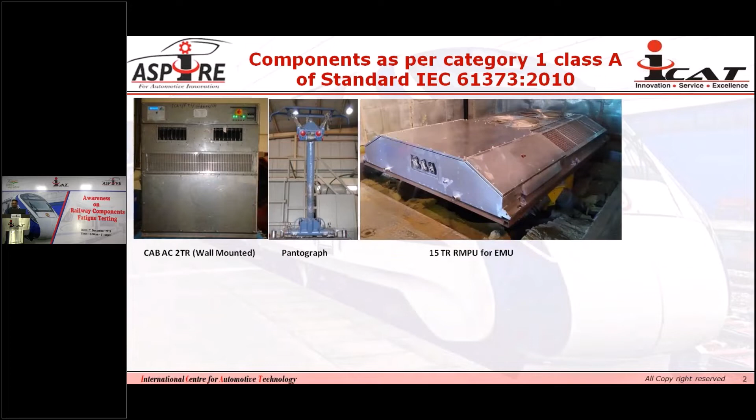So this is the cab AC 2TR wall mounted, which was tested as per the IEC 61373 under the category 1, pantograph, RMPU. So these are the components which we have tested as per the category 1 class A as per the standard IEC 61373:2010. LED based dynamic route map, oil cooler radiator.

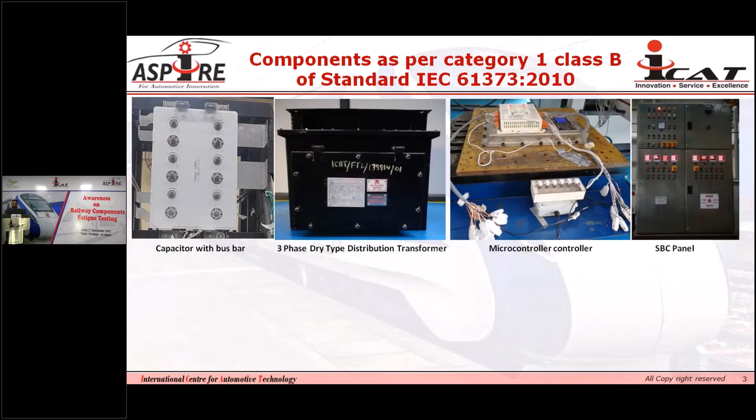Now the images of some components which we have tested as per the category 1 class B: capacitor with bus bar, transformer, microcontroller, panels, SBC underslung panels, line choke, and a spring loaded switch. So these are the various components which we have tested as per the category 1 class B of standard IEC 61373.

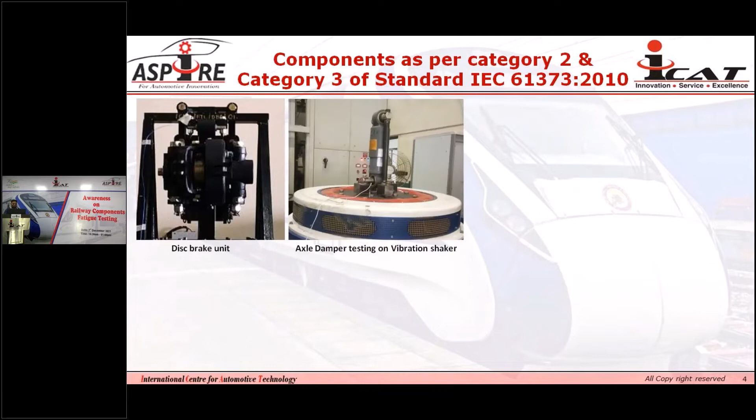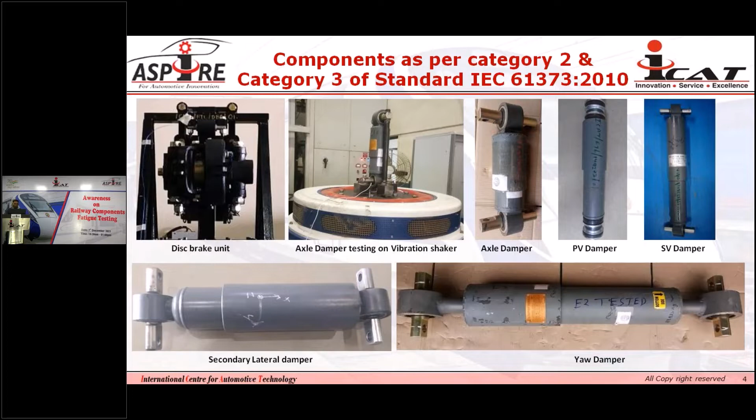Now there are the few components which we have tested as per the category 2 and category 3 of this standard: disc brake unit, axle damper, which we have tested as per the category 3 of this standard, primary vertical damper, secondary vertical damper. So these are the various components which we have tested as per the category 2 and category 3 of IEC 61373. So let's move on to the main contents of the presentation.

So these are the contents. First of all, introduction, scope of the standard, standard measuring positions used for the axle, bogie and body mounted for the different categories, general location of the equipment on railway vehicles and their resulting test category, testing as per the IEC 61373 2010 version, order of testing, method of mounting and orientation of equipment under the test, functional random vibration

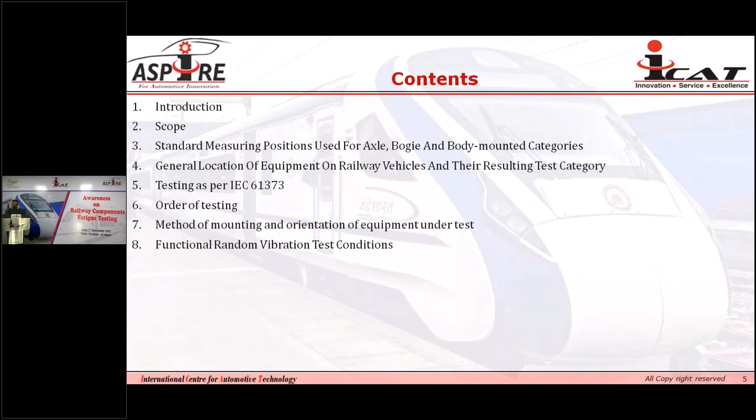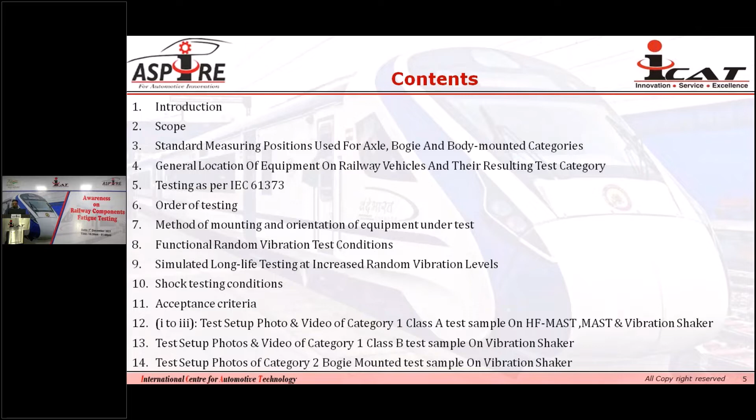test conditions, simulated long life testing at increased random vibration levels, shock testing conditions, acceptance criteria, and last we'll show you some photos and videos of testing for the different categories. For example, category 1 class A on HF mast and vibration shaker, test setup and videos of category 1 class B test sample on the vibration shaker, test setup of category 2 bogie mounted test sample on the vibration shakers. So introduction.

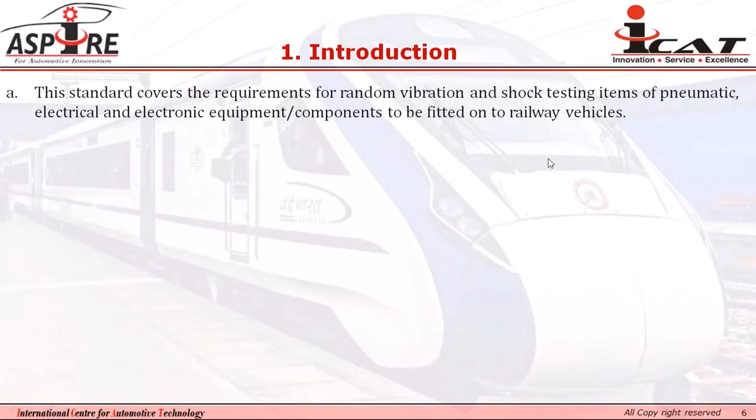Okay, so introduction. This standard covers the requirements for random vibration and shock testing items of pneumatic, electrical and electronic equipment/components to be fitted on the railway vehicles. The test content within this standard is specifically aimed at demonstrating the ability of the equipment under test to withstand the type of environmental vibration conditions normally expected for railway vehicles.

In order to achieve the best representations possible, the values quoted in the standard have been derived from actual service measurements submitted by various bodies from around the world. This standard is suitable for design and validation purposes. These tests may be performed on prototypes in order to gain design information about the product performance under random vibration. However, for test certification purposes, the tests have to be carried out on equipment taken from normal production.

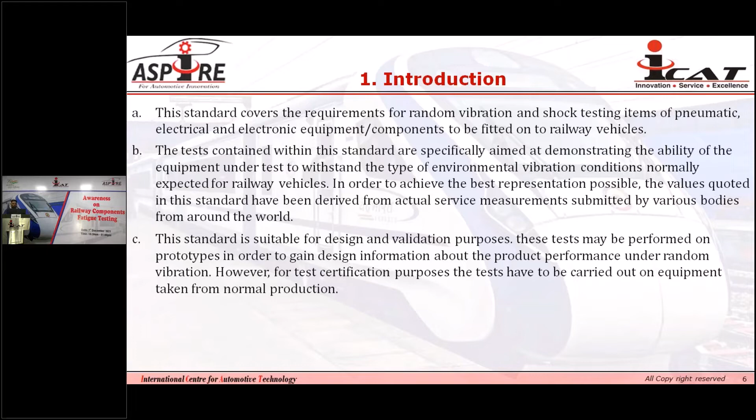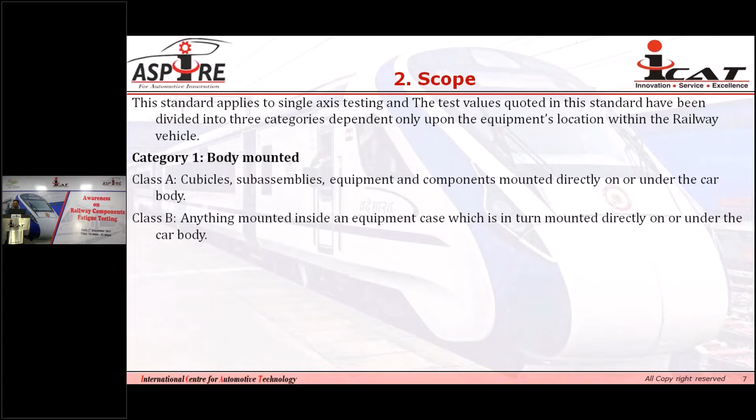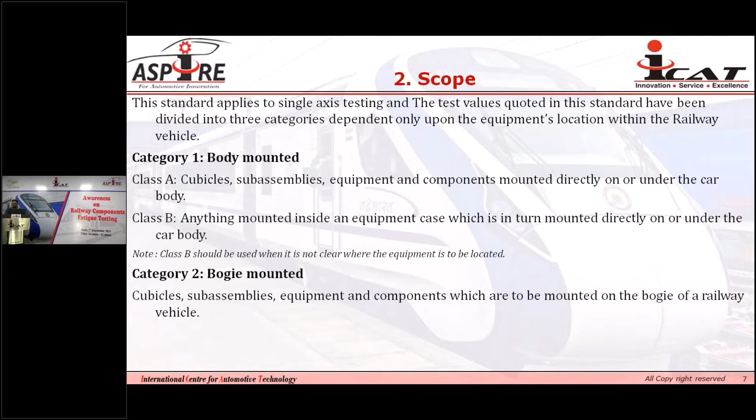And there is a note point. Class B should be used when it is not clear where the equipment is located. In that case, testing can be carried out as per the category 1 body mounted class B. Now the category 2, that is the bogie mounted. The cubicle, sub-assemblies, equipment and components which are to be mounted on the bogie of the railway vehicle come under category 2 bogie mounted. Now the category 3, that is the axle mounted. Components or assemblies which are to be mounted on the wheel set assembly of a railway vehicle come under category 3 axle mounted.

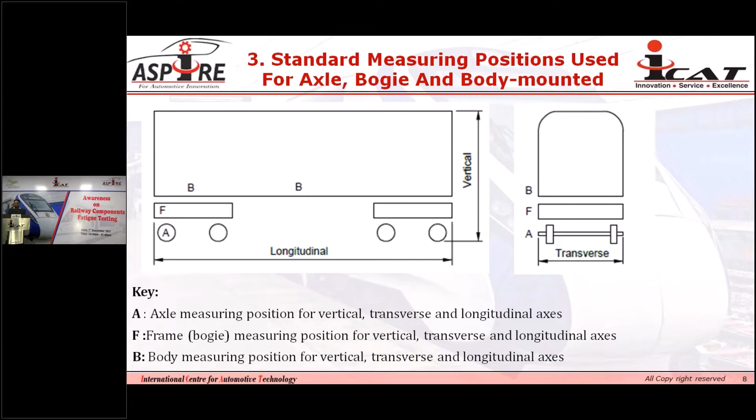If the components are mounted over the frame of the railway bogie, testing will be carried out as per the category 2 bogie mounted test condition. If the test components are mounted on the body, then the testing will be carried out as per category 1, either class A or class B as per the requirement or the position. We'll discuss further in a later slide in which condition we should consider class A and in which case class B. So now the general location of equipment on railway vehicles and their category. So this is again a schematic of the railway bogie.

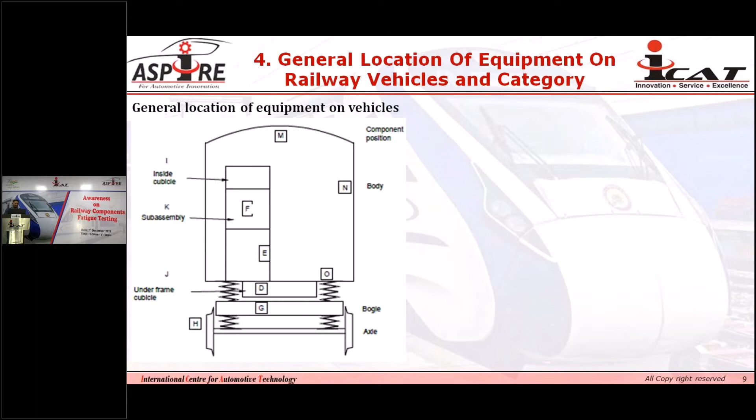So these are the major locations which are identified in the railway bogie where components are generally fitted. So first, for category 1 class A: location M, location N, location O, location I and location J. If the components are mounted at these locations, then the testing will be carried out as per category 1 and class A of standard IEC 61373.

If the components are mounted at location D on the frame of the coaches, in that case testing will be carried out as per category 1 class B of the standard. If the components are mounted at location K and location E, that means inside any large equipment, components mounted into a large internal cubicle which in turn fits to the car body, then again testing will be carried out as per category 1 and class B.

If the component is mounted at location F, meaning a sub-assembly inside any large components of the bogie, then again testing will be carried out as per category 1 and class B. If the components are mounted at location G, that is the frame of the bogie, testing will be carried out as per category 2, bogie mounted. If the components are mounted at location H, on the axle of the car body, testing will be carried out as per the requirement of category 3, axle mounting.

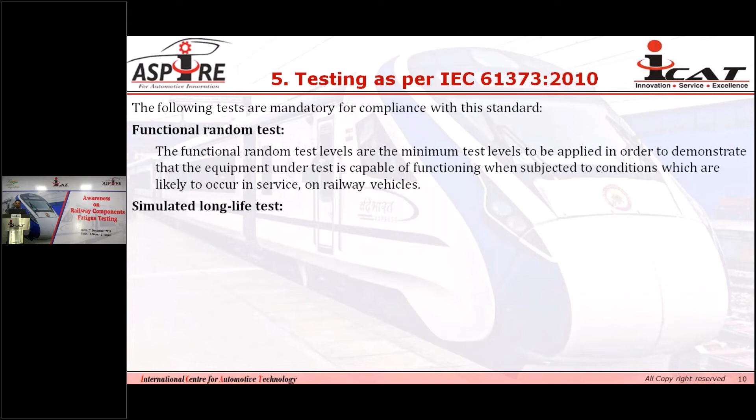Now the simulated long life testing at increased vibration level. The main objective of this test is to simulate the life of any equipment. This test is aimed at establishing the mechanical integrity of the equipment at increased service levels. It is not necessary to demonstrate ability to function; during this testing the equipment will be in the off condition.

Now the next test is the shock testing. The shock testing is aimed at simulating rare service events. It is not necessary to demonstrate functionality during this test. It will, however, be necessary to demonstrate that no change in operational state occurs, that there are no visual deformations, and that mechanical integrity has not changed. These points shall be clearly demonstrated in the final test report. For example, when we connect the coaches of a train with the engine, we might observe some kinds of shocks. So to simulate those conditions, these tests are carried out.

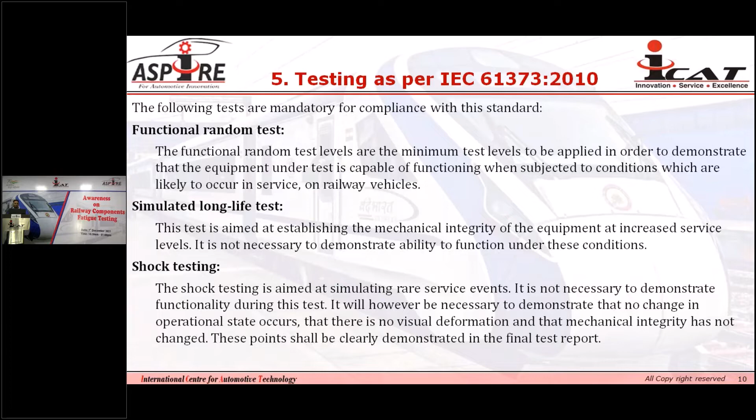So as we discussed, there are three tests: the functional random vibration test, simulated long life testing, and shock testing as per this standard. And all these tests will be carried out along all directions: vertical, transverse, and longitudinal. So now the question will come: what will the order of testing be? Which direction should we prefer first, then which direction, and after that which direction? This standard defines the possible order of testing.

So vertical, transverse, and longitudinal simulated long life testing by increased random vibration, followed by vertical, transverse, and longitudinal shock testing, and finally by vertical, transverse, and longitudinal functional random vibration testing.

Actually, this is the possible order defined by the standard, but it is also stated there that the order of testing may be altered to minimize rejigging, and the order of testing shall be recorded in the report. For example, if testing of railway components is carried on the vibration shaker, and if functional tests are carried as per this order - vertical, transverse, longitudinal - in that case we would have to do rejigging multiple times. So to avoid that, there is an option to alter the testing order to avoid rejigging of the test setup.

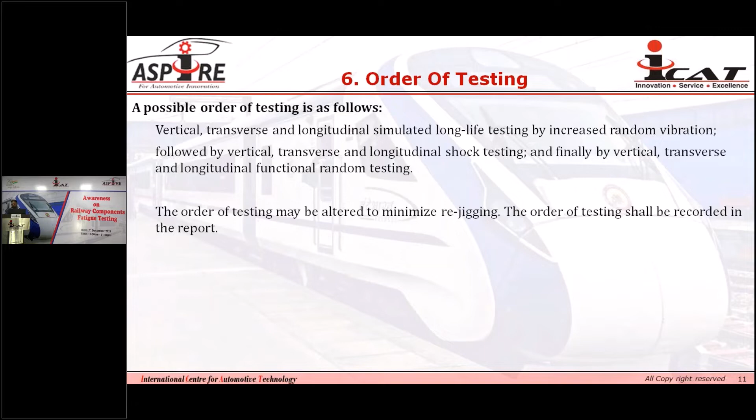Now, what is the method of mounting and orientation of equipment under test? The equipment under test shall be mechanically connected to the test machine by its normal devices of attachment, including any resilient mount, either directly or by utilizing a fixture. Unless otherwise agreed, it is preferred that the equipment shall be tested in its normal working orientation, with no special precautions taken against the effects of magnetic interference, heat, or any other factors upon the operation and performance of the equipment under test.

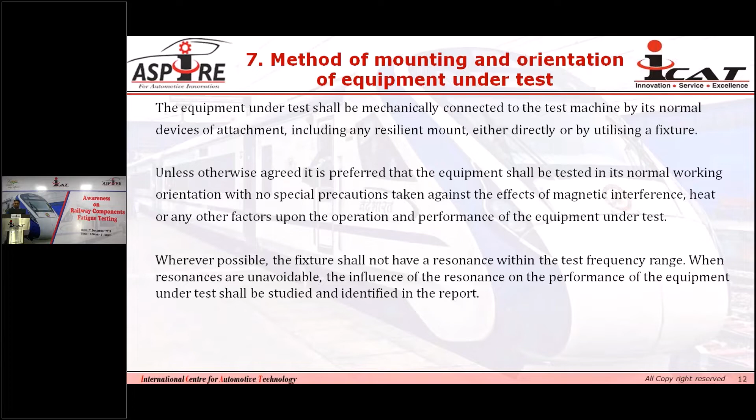Wherever possible, the fixture shall not have a resonance within the test frequency range. When resonances are unavoidable, the influence of the resonance on the performance of the equipment under test shall be studied and identified in the report.

This is an important point. Whenever you use a fixture to mount components on the test bed, it must be taken care that the fixture should be resonance free in the test frequency band. If there is a resonance in the test frequency band, it can impact the overall test result of the equipment, and it can hamper its mechanical integrity, or the sample may fail if there is a huge resonance in the fixture within the test frequency band.

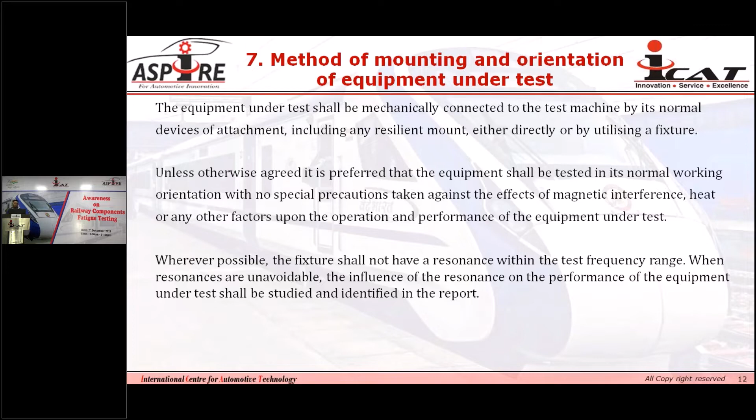Now let's move on to the testing. The first test is functional random vibration test. This testing is of minimum 10 minutes, and as we already covered, this is a test condition to simulate the service condition of the railway. These are the various vibration levels, RMS GRMS levels, given for different categories and classes. There is a very low GRMS for category 1 and class A components that are mounted on the body, because that part of the railway coach observes very little vibration.

That's why the RMS acceleration is also very low for this category. After that, the second highest is category 1 class B body mounted, because that part of the components in the railway coaches receives comparatively higher vibration levels compared to category 1 class A. So in this case, the RMS acceleration is comparatively higher.

Next is the bogie mounted category, those components mounted on the frame of the coaches. In that condition, the frame of the railway coaches observes comparatively higher vibration levels, so the RMS acceleration is comparatively high.

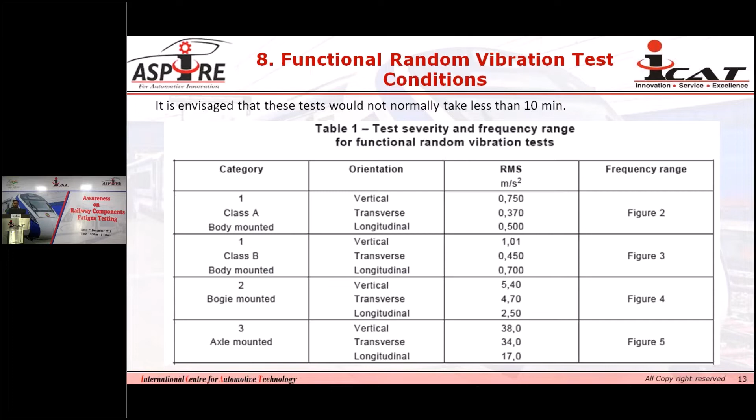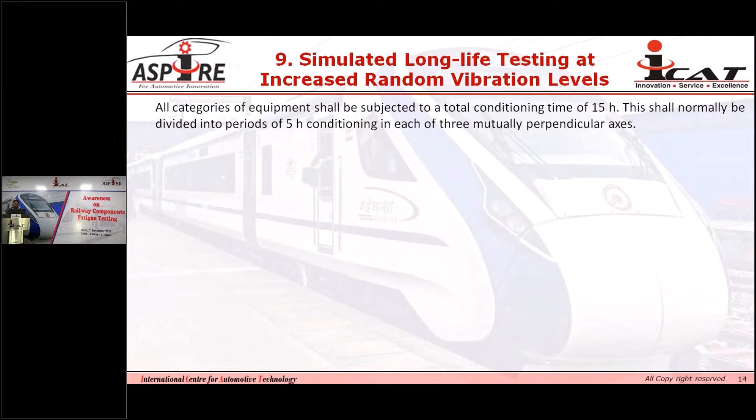Now the next test is simulated long life testing at increased random vibration level. The objective of this test, as we discussed, is to verify the mechanical integrity of the test component, and this is a total of 15 hours of testing - 5 hours along each direction: 5 hours vertical, 5 hours transverse, 5 hours longitudinal.

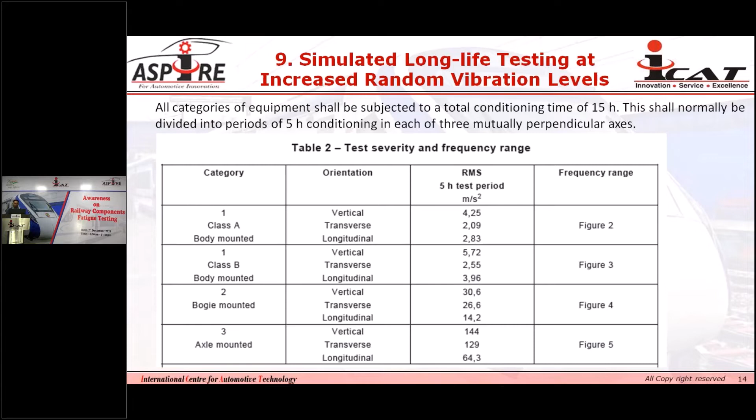Now figure 2 and figure 3 are for category 1 class A and class B body mounted. These figures depict how we can select the frequency band for a particular test component. Let me take the first example: figure 2 is for category 1 class A and figure 3 is for category 1 class B. The difference between these two figures is only in the ASD level, that is the acceleration spectral density, and GRMS level. The rest of the frequency band is the same in both cases.

The weight criteria is same in both classes. So how will we select the test frequency band for different weight of the test component? For this standard, the frequency band totally depends on the weight of the test component. For class A and class B, category 1, if the weight of test sample is less than or equal to 500 kg, then the frequency band will be 5 to 150 Hz. If the weight of the test sample falls between 500 kg to 1250 kg, there is a formula to calculate the lower frequency and higher frequency.

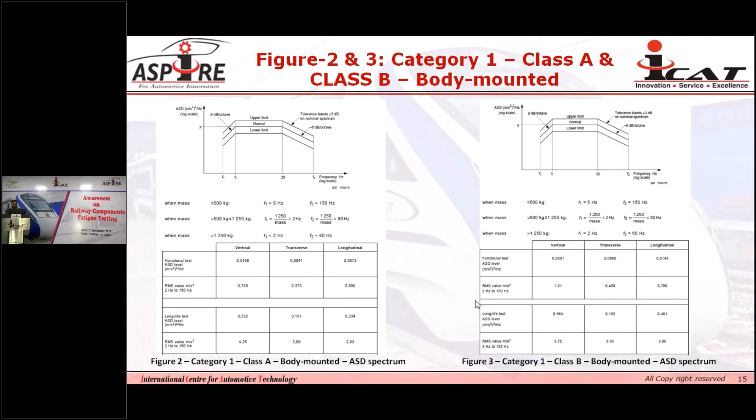Now figure 4 and figure 5 define the frequency band for category 2 and category 3, body mounted and axle mounted components. Let's first discuss category 2 bogie mounted equipment. If the mass of the test component is less than 100 kg, the frequency is fixed at 5 to 250 Hz. Again, if the mass of the test sample is between 100 kg to 250 kg, we have to calculate the lower frequency and higher frequency.

In this case, the formula is different compared to the previous case. For the lower frequency, we calculate 250 divided by mass of the test component, multiplied by 2. That gives us the lower frequency. For the higher frequency, 250 divided by mass of the component, multiplied by 100, gives the higher frequency. And if the weight of the test component is more than 250 kg, again the frequency is fixed, that is 2 Hz to 100 Hz.

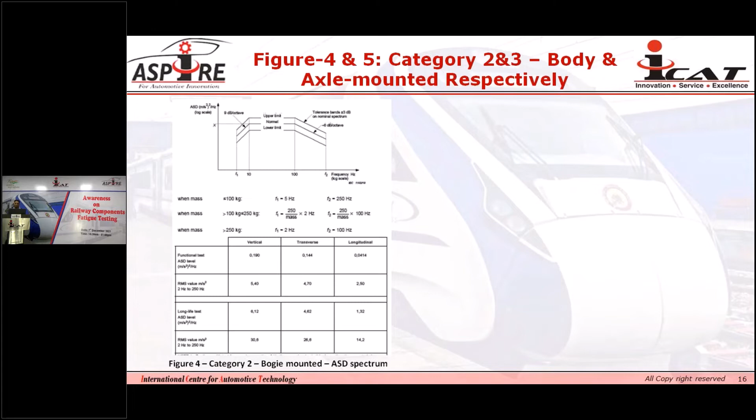Again, this is the table for the ASD level for the vibration test, along the vertical direction, transverse direction, and longitudinal direction. Also for different ASD levels for the simulated long life testing for the vertical, transverse, and longitudinal direction. So for category 2, this is basically the figure from which we can calculate the test frequency band for the category 2 test component. Now let's move on to category 3, that is the axle mounted components.

So in this case, test frequency band is on the higher side. If the mass of the test component is less than 50 kg, the test frequency will be up to 500 hertz. Means lower frequency will be 10 hertz and higher frequency will be 500 hertz.

If the mass of the test component is more than 50 kg and less than or equal to 125 kg, the lower frequency will be 10 hertz and higher frequency, again, we have to calculate 125 divided by the mass of the component into 200. So it will give us the higher frequency.

Important point: in this case, to calculate the lower and higher frequency, it is only the mass of the test sample that is taken into account for the test frequency band, not the mass of the fixture. This table also defines the ASD level for the functional test as well as the ASD level for the long life testing at increased vibration level. So this is all about the calculation of the frequency band for the different categories.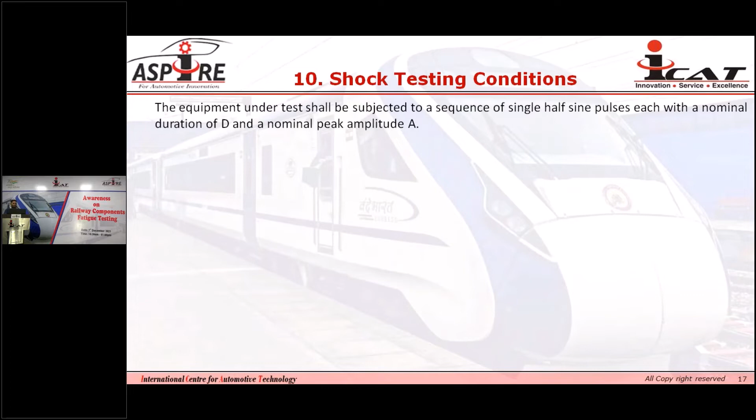Now let's move on to the shock testing condition. This is the last test of this standard. The equipment under test shall be subjected to a sequence of single half sine pulses, each with a nominal duration of D and a nominal peak amplitude A.

If we refer to category 1, class A and class B body mounted, you will find the same acceleration level and nominal duration for both class A and class B. Along the vertical direction 30, transverse 30, and longitudinal 50 meter per second square. This is the acceleration level, the pulse duration, and the wave shape will be half sine.

Total number of pulses to be generated along each direction will be 18 shocks. Means 3 positive shocks and 3 negative shocks along each direction. So 6 pulses will be along vertical, 6 along transverse, and 6 along longitudinal axis.

Now the bogie mounted: for all directions, the acceleration level is the same, that is 300 meter per second square, meaning 30g acceleration, and the nominal pulse duration is comparatively less, that is 18 millisecond. Okay, next is the axle mounted.

For the axle mounted, acceleration level is 1000 meter per second square, meaning 100g, and the nominal duration is 6 millisecond. So for category 1, category 2, and category 3, acceleration level and nominal duration of pulses are different, but the number of pulses for all categories will be the same, that is 18 pulses for category 1, category 2, and category 3.

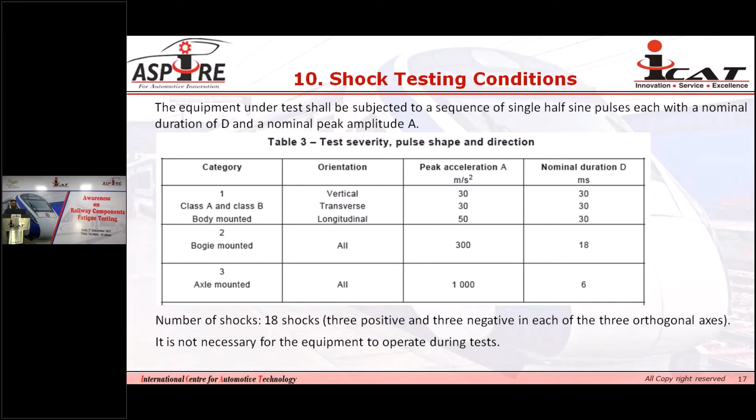Important point: it is not necessary for the equipment to operate during this shock testing. The main objective of this test is to check the mechanical integrity of the test component, not to check the functional parameter of the equipment. So equipment will be in off condition during this testing.

Now the acceptance criteria. What are the acceptance criteria as per this standard for all the components? On successful completion of all of the following tests, the equipment shall be considered suitable for test certification. Means all the tests: functional random vibration testing, simulated long life testing at increased vibration level, and shock testing. If all tests are completed successfully, then these are the criteria which must be fulfilled by the equipment to issue the test report.

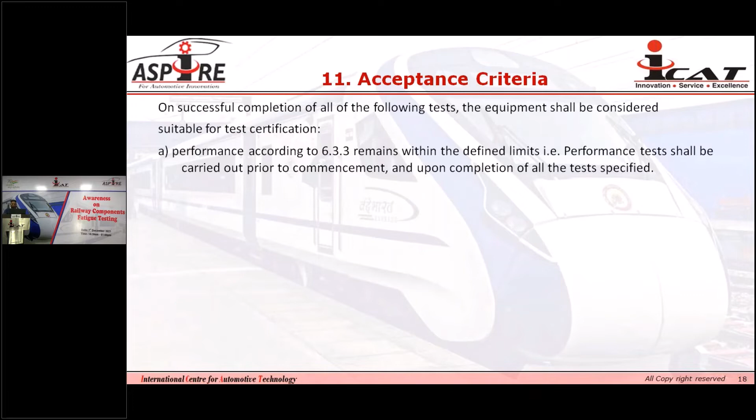First of all, performance according to 6.3.3. This clause in the standard defines that the performance test shall be carried out prior to the commencement and upon completion of all the tests specified. So before starting the test, we must check the equipment is working properly, and whatever performance criteria is mentioned in the QTP or in the standard for that particular component, that should be checked before commencing the test and after completion of test.

Next is the function according to 6.3.2, remains within the defined limit. Functional test of the DUT, as we have already discussed. So during the functional random vibration test, the functional test must be carried out along all directions for the equipment, if it is specified for that particular DUT or test component.

Next is no visual deformation, and mechanical integrity has not changed. As we have already discussed, the simulated long life testing and shock testing refers to the mechanical integrity checking of the equipment. So mechanical integrity should not change after completion of the testing. Then we can issue the test report against this standard.

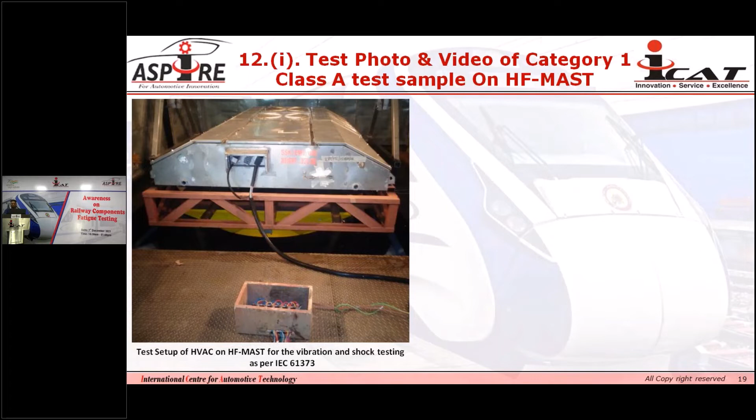Now there are some photos and videos of testing which we have carried out in our test facility at ICAT. So let me show you the test setup of the RMP unit which we have done on our high frequency multi-axis simulation table. So this is the setup which we have done, and this is the video which I'm going to show you.

So this is the video which we have shown to you, the vibration which we have simulated over the RMP unit along the transverse direction. So we have some more videos, let me show you. Okay, so this is the setup which we have done on our high frequency multi-axis simulation table, and the video which I have shown you. Vibration is being simulated along the transverse direction.

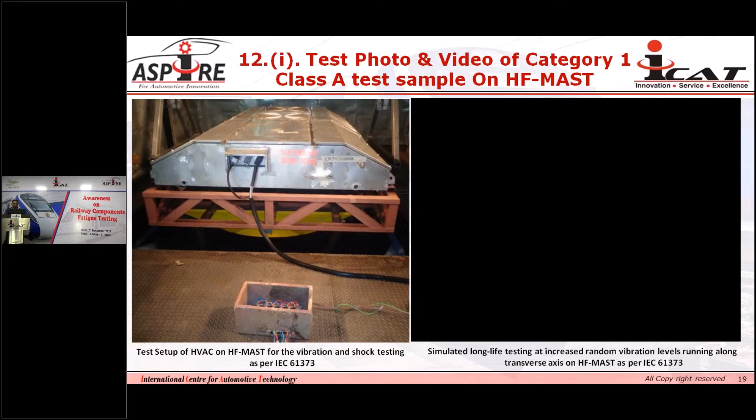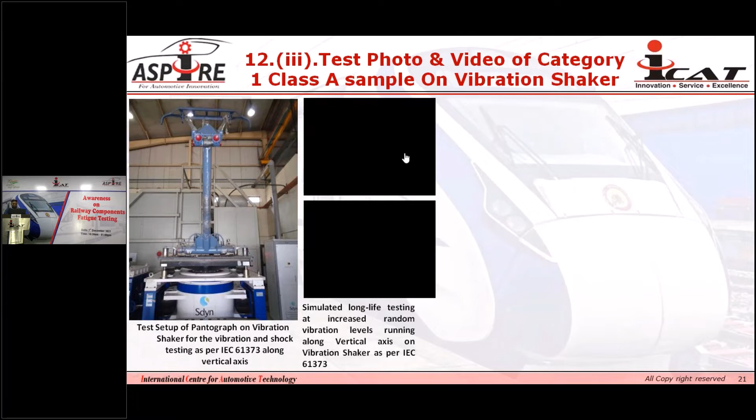Okay, so this was the video in which vibration is being simulated along the longitudinal axis. So you might have observed which components are majorly exposed to the vibration in the different directions. Along the vertical direction, the major part exposed was the springs and their cantilever, and along the longitudinal direction, you have seen this part of the pantograph is exposed to more and more vibration. This part is observing a high degree of vibration. So during the design of the components, the manufacturer can take care of these parts to avoid failure during the testing.

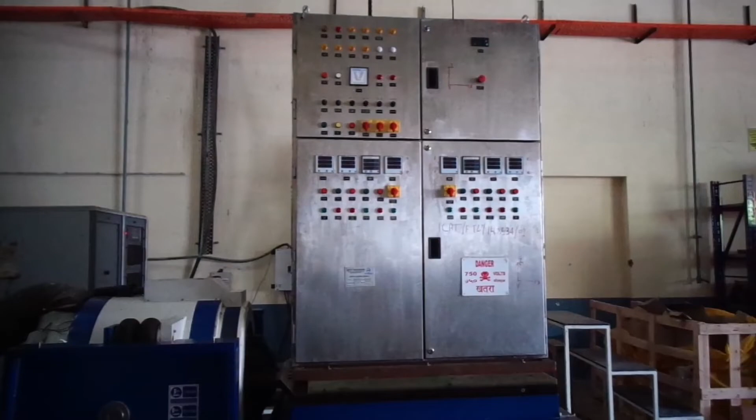So the main purpose of showing the video was so you can analyze which direction will be more severe for the different components. For the pantograph, you might have seen the longitudinal direction was more severe compared to the vertical direction. Similarly, for this panel, the vertical direction is okay, but the longitudinal and transverse directions are more severe for the testing of panels. So these things the manufacturer can take care of while designing the test component. For different components it might be different; in the vertical, transverse, and longitudinal, any direction can be the more severe.

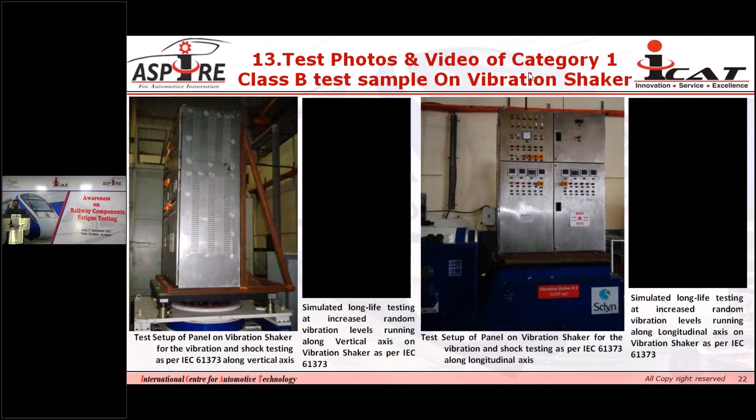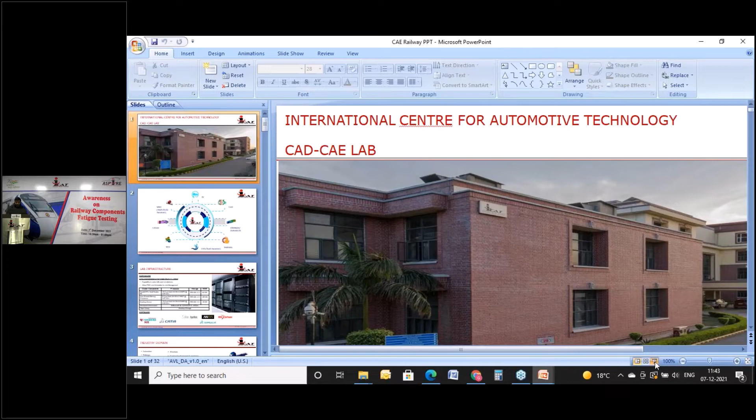Here I am today for the presentation on railway components, CAE simulation and design activities. So initially we will start with a very brief introduction about our lab, that is CAD CAE lab. At ICAT, under the CAD CAE lab domain, we work for the various activities in the product development, which relates to CAD development, electric vehicles, strength durability, fluids and thermal, NVH, crash, and multi-body dynamics.

So if you see, all these aspects basically cover a complete product cycle, where we try to understand the product in a virtual environment first, and then release the data for the prototype, wherein we further go for the testing activities. This comes the lab infrastructure. So as you can see on the screen, we have a high performance computing cluster, wherein we can go for very high intensive, memory intensive or core intensive jobs in the domain of CAE.

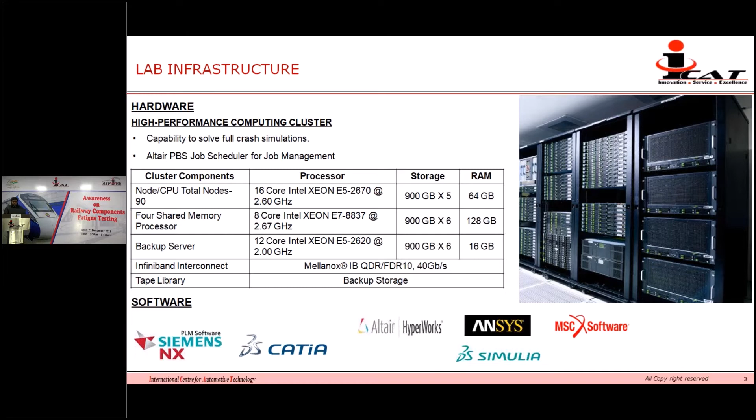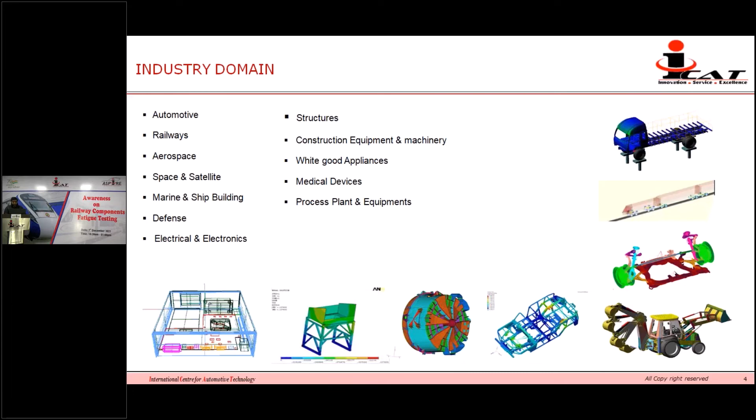And these are the various simulation tools which we use. These are all the commercially available industry accepted tools. Like in CAD, we use Siemens and CATIA. And for the simulation domain, we use ANSYS, HyperWorks, MSC, and Simulia. These are the various simulation domains wherein we work for the various industries, which includes automotive, railways, aerospace, structures, medical devices, etc. These are some of the very basic case studies. I just want to have a glimpse of it.

So we work upon strength and durability simulations, which includes component structural, low cycle fatigue, high cycle fatigue. And these are some of the images which you can see on the screen that we have worked upon for some of our customers to develop the product in the virtual environment. Now coming to thermal simulations, we have worked upon battery thermal management, thermal stress fatigue, exhaust system development, etc.

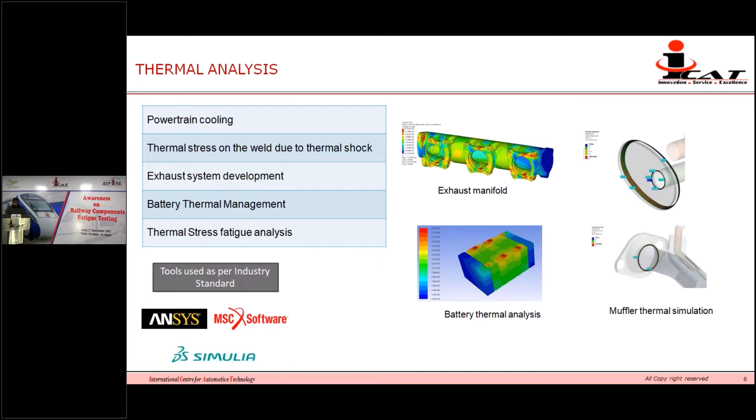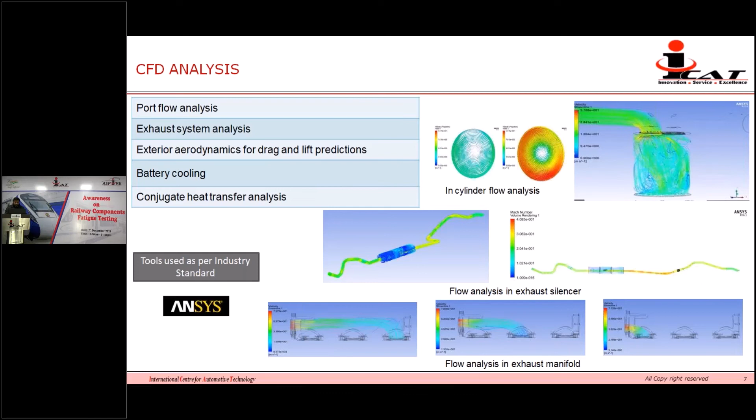Similarly, in the CFD domain, this links to a CFD simulation for an engine in-cylinder flow and also for exhaust manifolds. And we have also worked upon some simulations related to port flow, battery cooling, and other conjugate heat transfer simulations. Now coming to the crash and impact analysis, this includes various types of simulations in the real-time domain.

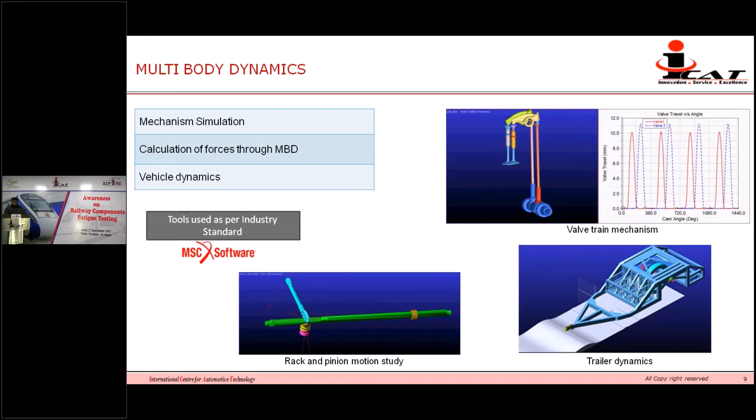This links to the multi-body dynamics, wherein we try to study the mechanisms of any component. For example, on the screen you can see a rack and pinion motion, and this relates to a passenger car vehicle steering system, trailer dynamics, and valve train mechanism of an engine. This is another facility which we have, which we use for the prototyping. It has both the facilities of plastic as well as metal.

Now coming to the agenda of the session, basically the webinar, we work upon various components also for the railway suppliers, wherein we work upon fixture design and also some simulation case studies which I will be presenting today. So we'll be starting with the fixture design which we do for the fatigue testing lab, and it is basically to mount the component over the vibration shaker and proceed for the further testing as per the relevant standard.

What about the fixture design? A very basic question: what does a fixture mean? It provides a mounting surface for holding the device under test, that is a DUT, and it has provision to get itself mounted on the shaker table.

Then we understand whether there are single samples or multiple samples, how the DUT will be oriented, what are the table dimensions on which the testing has to be done, what about the weight, length, width and height considerations of the component, and whether we are going to use the fixture for a single purpose or it is going to go for another testing or for future adaptations.

After the initial design stage, we try to understand the activity of the fixture in the simulation environment, wherein we try to identify the natural frequencies and the mode shapes. Then we consider whether there is an option of reducing any weight, or we can add any stiffness to the fixture. And then we repeat our simulations and optimize the results for performance or machinability, and try to make it as light and stiff as possible.

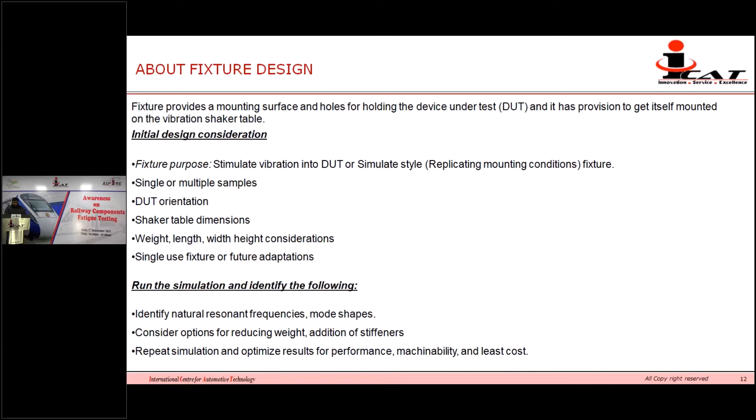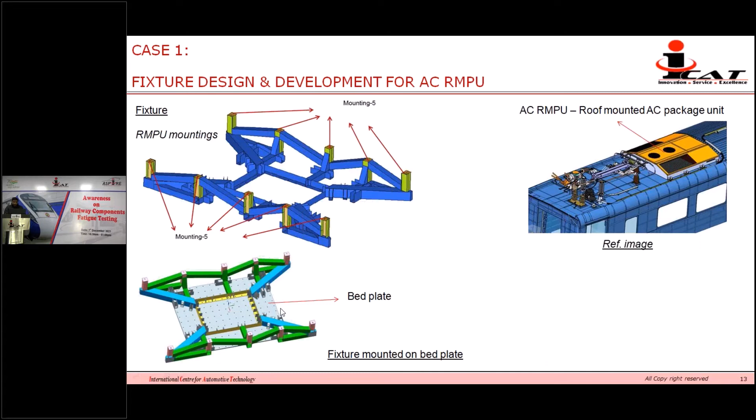That was the design part, and now we go for understanding its activity in the simulation environment. So we try to model it as an FE model with the material as steel. We did a mid-surface extraction of the geometry, then modeled it as a 2D mesh, because we have used tubular structures of thickness ranging from 4 mm, 5 mm, 6 mm.

And then we go for the basic simulation, that is a modal simulation, where we try to understand the frequency of the fixture, how it will behave if it is vibrated under certain conditions. We can do two types of simulation in the model. Initially we can do a basic run of the model check, and then we can go for mounting the component mass. You can see there is a mass of 900 kilos, which is the RMPU mass, that is roof mounted package unit. And then we try to simulate how the fixture will behave when the component is loaded on the fixture.

The frequencies will be different if you test the fixture independently and if you test the fixture with the component. Basically, we have added the mass, and we are not considering any stiffness of the component here, because that requires a lot of modeling. This is also a conservative approach, where we take only the mass and not the component stiffness. So in this case, the frequency you get will be on the worst side. It will be a minimal frequency, and actually it will be at a higher level.

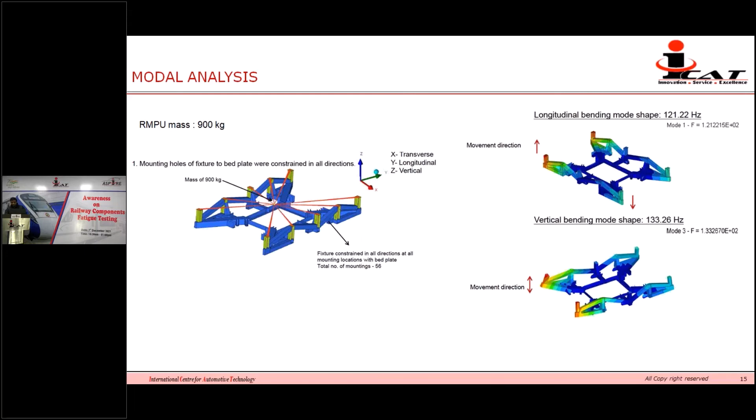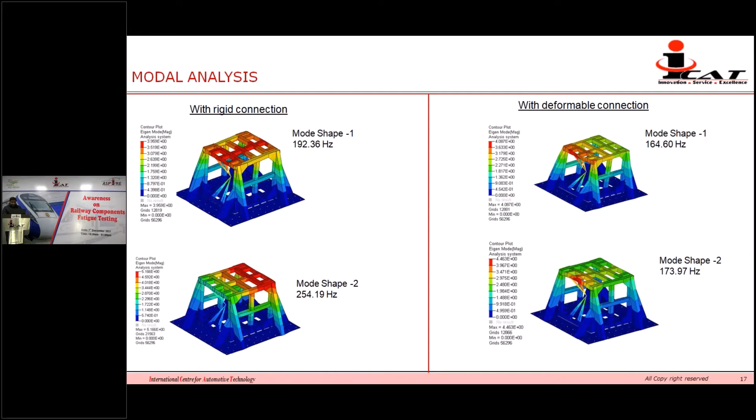These are some of the animations you can see on the screen, how the component will actually behave during the modal simulation. This is the natural behavior a component might exhibit during the vibration shaking activity. So we try to avoid these shapes and these frequencies so that the fixture does not amplify the loads coming from the shaker onto the component.

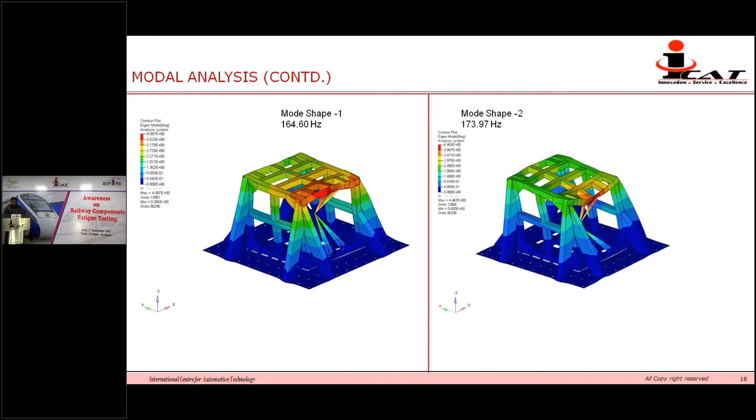As we know, every component has to go through various types of tests. It can be a shock analysis, or it can be a random response, or a random response fatigue type of testing. So this is an example showing how the shock also can be done on a fixture. So we try to model the shock as per the specification.

So suppose, for example, on the x-axis, you have acceleration levels up to 50 G that have to be achieved in a time span of, say, 30 milliseconds. And similarly in the y-axis and the z-axis. Because we need to check whether a structure is going to withstand that amount of force or not during the testing phase.

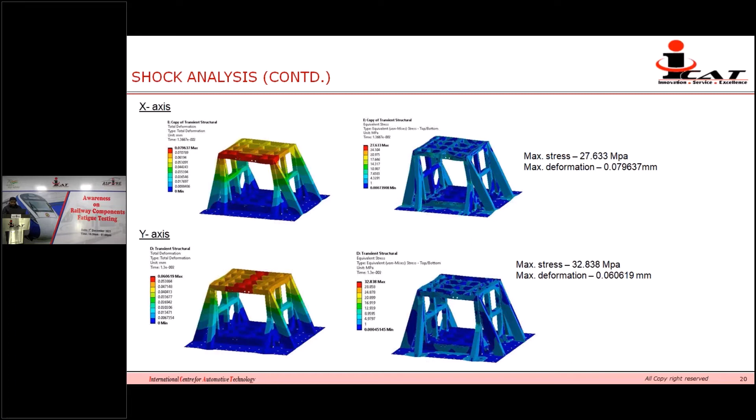This is a snapshot of the deformation and the stress plots for the fixture design, which was just shown for the capacitor unit. So you can see we are trying to look at how the fixture will behave during the shock testing. So we try to minimize this and try to keep our FOS around 3 to 4 or 5 in order to be on the safer side during the testing. The objective is always to make a fixture as rigid as possible and as light as possible. This was about the fixture design.

Now I will be presenting a case on the CAE simulation which we have worked upon for an AC RMPU complete unit, as per IEC 61373. In the previous presentation, you have already seen the physical testing methods, what the loads are and how the testing is being done. So before the testing, there is a possibility of doing it in a virtual environment and predicting whether there is any major issue or any problems which you can identify during the virtual phase itself, so that the testing can be cleared in one go. So basically we want to predict at a very early stage how our design is going to perform in a physical environment. That is the overall objective.

So starting with a very basic static simulation. This is a complete RMPU assembly unit, and it is being mounted on the rooftop of the bogie through 8 brackets. The brackets you can see on the screen. There is a bolt which is mounted on the flat surface of this bracket. And we constrain all of those, because if the bolts are tightened on the roof body, the assumption is that it is fixed at those locations. And then we give a 1G load, or we can give a 3G load. Initially you can see it's at a 1G load condition. The RMPU weight is around 700 kilos here.

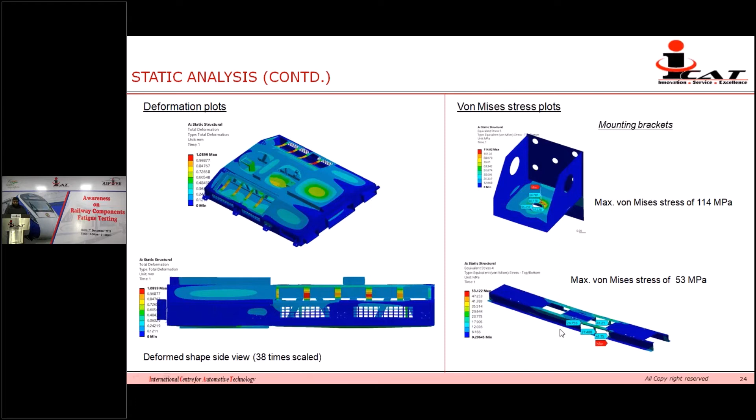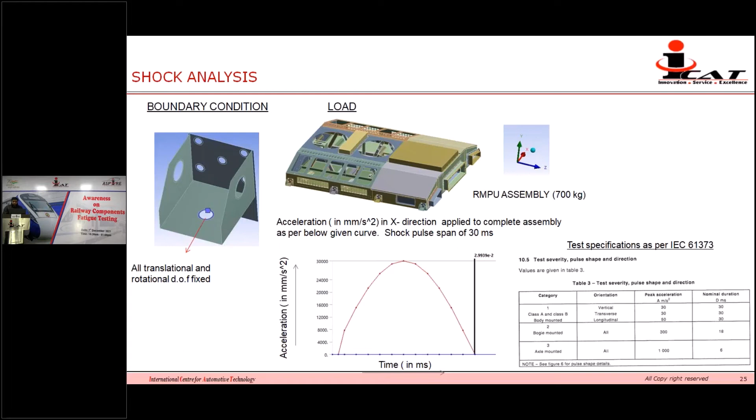All these tests are being done as per IEC 61373. Shock analysis is another part of IEC 61373. You can see the specifications mentioned on the screen. There is a peak acceleration of 30 meters per second squared in the vertical, then transverse 30 and longitudinal 50 meters per second squared. A similar concept is applied here to simulate this complete assembly in the form of a shock test.

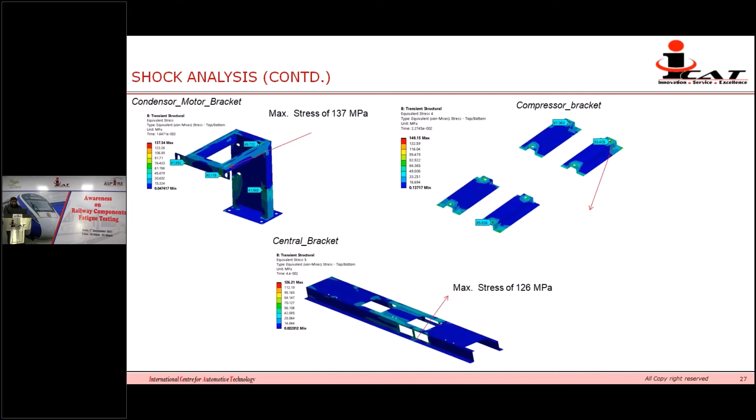Now coming to the next is a random response. In the random response, the functional test, you can see the specifications as per IEC 61373. Similarly, the setup is the same. Only thing, we have to introduce a new type of loading, that is a random response, which reflects a probabilistic type of testing, wherein we accumulate the transient data.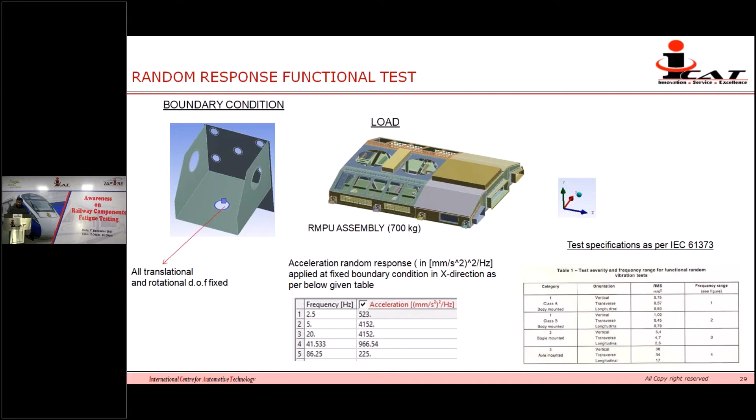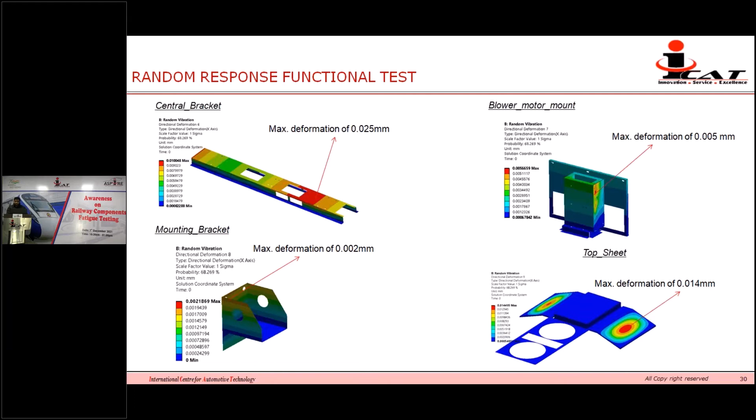And the same is being applied on the complete assembly. And again, we try to predict whatever deformations and how the stress levels are there in the component. This is for the random response functional test. And similarly, we can also go for the random response fatigue testing in the simulation environment.

Now, coming to the end of the presentation, what all we can do in CAE in a railway engineering domain, or for any railway component or railway assemblies. So we can go for the structural analysis of components and assemblies as per IEC 61373, which I just presented in the previous slides. Then we can go for the prediction of aerodynamic effect of the pantograph, because a pantograph gets mounted on the locomotive rooftop with a train running at say 160 kmph or 150 kmph, it's important to understand the behavior of the pantograph during the aerodynamic effects, and that can be predicted through a simulation environment. Also, the pantograph's structural integrity should be maintained, which can be tested as per IEC 61373 and EN 12663.

Apart from this, we can also work upon crashworthiness for rail coaches, design validation of wagons, bogie validation for transient load cases, that is, time dependent loading for any bogie component or any bogie chassis, passenger safety studies, then optimization of anchor link brackets or any other component, wherein we want to reduce the weight of the component, or we want to understand whether we can use any other material to make it more lightweight and more structurally optimized.

And also we can work upon some kinematic simulations of the rail mechanisms of brake dynamics, or any other simulation which can be related to a mechanism type of phenomena. And apart from this, there are many more simulations and design activities which can be done in the railways engineering domain. So we can support in any further activities if you have any type of requirements related to CAE in railways engineering.

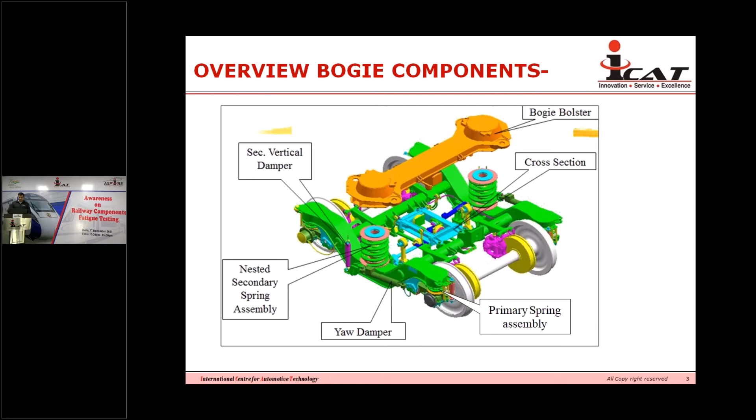Now, these are some physical photographs of an actual bogie - vertical dampers, primary spring assembly, secondary spring assembly, secondary dampers, and yaw dampers. These are basically the structural components used in a bogie. Apart from this, the frame of this bogie component is also tested, and there are some other tests we conduct for silent blocks, dampers, and other components.

So I will go through 3 case studies. One is damper test. Damper test is basically conducted for secondary and primary spring dampers. These dampers are used inside a test setup with sample cooling jackets to provide cooling and avoid any kind of heating during testing. We use this whole setup with our servo hydraulic actuators - we prepare fixtures, and then we apply the loading.

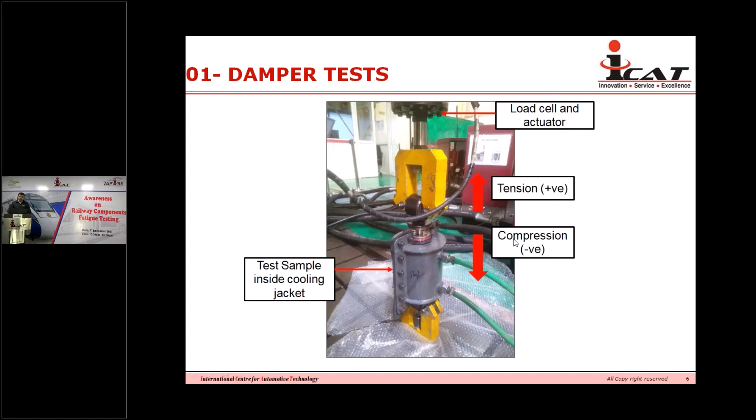Basically there are two kinds of tests we perform. One is damping performance test - you can call it a performance test of a damper, or characteristics test - and another is fatigue test. In damping performance tests, we can conduct in two ways. One is we find the load versus deflection curve at different amplitudes and constant velocity, or different displacement and constant velocity. Another is a load versus deflection curve at different velocity and constant amplitude.

As we know, damper forces are directly proportional to velocity. So if we change the velocity with constant amplitude, the forces will be high, as you can see in this curve. This curve is basically at different velocities, but the amplitude is 9.5 mm. We keep the stroke at the middle - the damper has an overall stroke of 100 mm, so we keep it at 50, and then from there we give some amplitude.

That amplitude is already decided by the customer, and we provide that much through our servo hydraulic actuator with different frequency, or you can say the velocity. So one is at 0.5 hertz frequency, then 1 hertz, then 2 hertz. The load is continuously increasing with respect to frequency, or higher velocity. Another thing is we plot the load versus deflection curve of one cycle to understand the behavior of a damper.

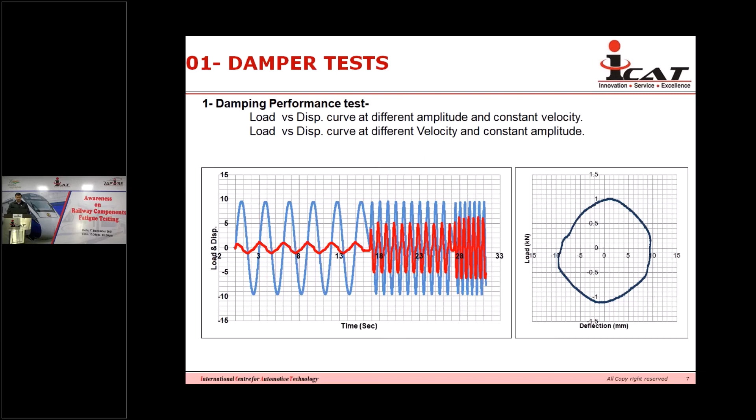For fatigue test, it is actually the loads or displacement which come on the field that are the damaging displacement. Generally, as a thumb rule, we take around 50 to 75% of the total available stroke - for example, 100 mm stroke available on the damper. So we conduct at plus minus 25 or plus minus 35.

These are some general instructions we follow, and the frequency we generally take is from 1.6 Hz to 2 Hz, or we can go higher, but depending on the temperature, we should not exceed the damper temperature above 55 or 60 degrees, because if we go above that, the oil characteristics inside the damper deteriorate - its viscosity deteriorates, and definitely performance will deteriorate. So we keep in mind parameters like oil temperature as well as damper performance. For railway components, we generally perform very high cycle fatigue tests, ranging from 16 lakh cycles to 25 lakh cycles.

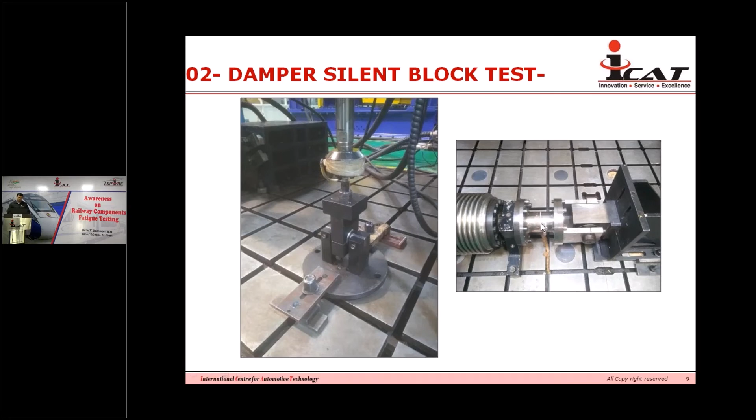So we give amplitude of plus minus 1 degree, and we check how much torque is coming. So torque divided by that displacement, we calculate at 1 degree. This gives us the characteristic value of the performance test of these silent blocks.

So these silent blocks we then conduct for durability test, and similarly the load values coming in the field, that load we need to provide on the dampers, on the silent blocks. These load values are provided by the customer or the railways to us, or as per the standard of railway. So the minimum number of cycles we perform is 25 lakh cycles, or as per the customers or manufacturers.

And frequency we can go up to 10 hertz or 15 hertz, depending on any kind of heating of the rubber component, because these are generally rubber and metal bonded components. So we can go up to 10 hertz or 15 hertz, considering there is no heating inside the rubber. So the acceptance criteria is the same: maximum deterioration of this stiffness value is up to 20%, or as specified by the manufacturer. So this is the testing of damper silent blocks.

And another one we recently conducted is railway springs. These are primary and secondary springs. These are our customized setups, and we conduct this setup for railway and their suppliers. So we need to check three tests.

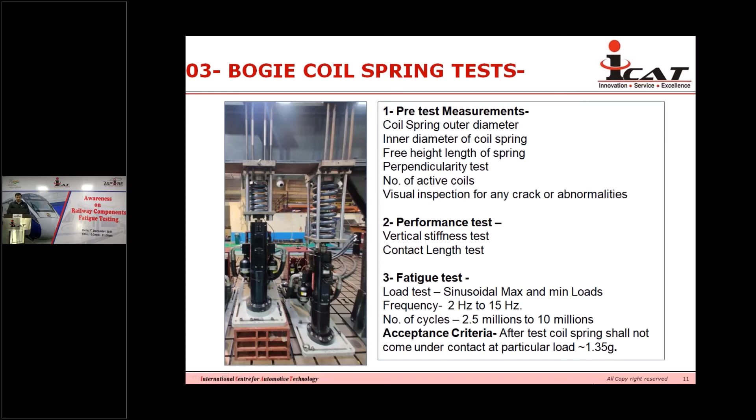The acceptance criteria related to this test is after testing the complete cycle, we need to check the contact of these spring coils. So there should be no contact between these coils at a particular static load or higher loads. It is generally 1.35 G of the static load which is coming on the spring.

This is one calculation based on some of our experiences or projects we have done, like loads coming on the coil springs, how we derive the load cycles. So mass of passenger per car is MP, mass of the bogie is MB, mass of the suspension is MS, and mass of the overall vehicle car is MB plus MP plus MS. Number of bogies per car is generally 2 for railway and metro use, and number of axles per bogie is 2.

So there are 8 numbers of springs per car, because there are 4 numbers of primary springs per bogie. So static mass on primary spring is MB by 8, because there are 8 numbers of primary springs per car.

Then maximum vertical acceleration during running. In railway, the rule, or experience, is 1.25 G to 1.4 G, or it may be some lower side as well as higher side. Generally it is from 1.25 G to 1.4 G, this vertical acceleration coming on the railway bogie.

So static load on primary spring is MB by 8 into G, this is in terms of Newton. Then maximum load is 1.5 G into ML, where ML is basically the static load. And minimum load is 0.75 G into ML.

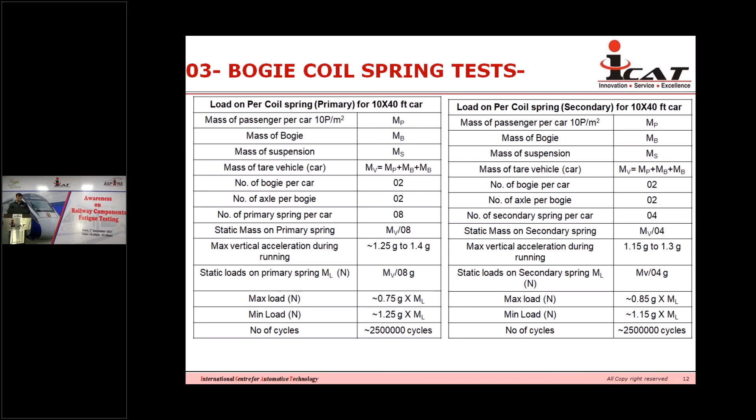We have n numbers of actuators, 17 numbers of actuators ranging from 15 kilonewton to 1000 kilonewton, all servo hydraulic actuators, and we can go up to a frequency of 15 to 20 hertz, and with our 1000 kN machine we can go up to 50 to 60 hertz, with respective strokes. We also conduct propeller shaft testing and other shaft use like anti-roll bar torsional testing using our rotary actuator. We have a 10 kilonewton rotary actuator for testing of the coupler or torsional testings.